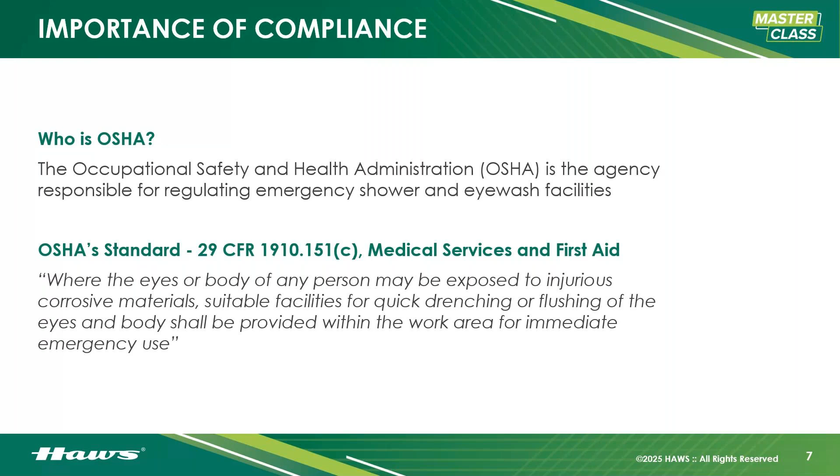Now, what we're doing by adhering to Z358.1 and educating ourselves on it is reducing injuries and fatalities, lowering general workplace risk, lowering potential lost time and money for the employee and the employer. There might be litigation, hospital bills - there's so much that's going to happen afterwards, the ugly part. This is insurance - adherence to Z358.1 is insurance against everything that's going to come after the incident.

Somebody gets exposed to a corrosive or nasty material or substance, and a lot is going to happen. This is going to ensure the employee goes home the way they showed up to work. It's going to ensure that as an employer, you have the proper functioning, working equipment for that employee. Even here at Haws, we have some areas where combination showers, full body decontamination needs to be taken very seriously, and that's what this does. This lets us know what we need to do.

Now, OSHA has stepped up enforcement, of course. On August 1st, 2016, OSHA fines increased for the first time since 1990. It wasn't that long ago, but that's still news to some people. OSHA fines increased by a gigantic, scary margin. Then effective in 2018, they said officially for inflation they'll be adjusting year over year, so there's never a big jump like that again, which was terrifying.

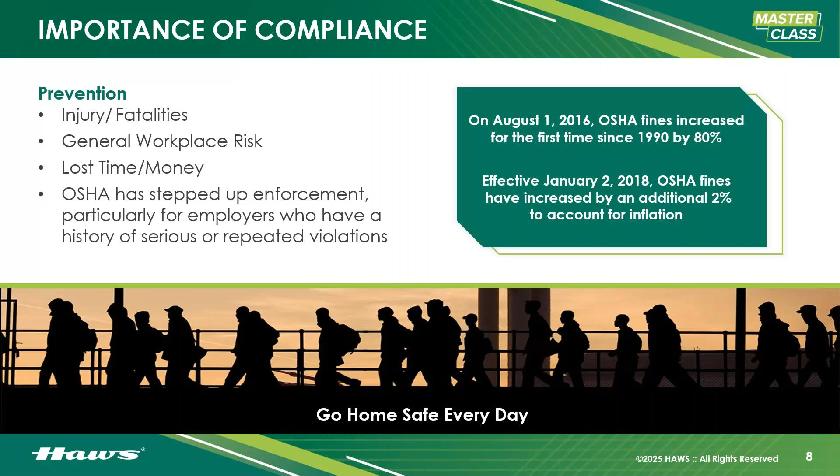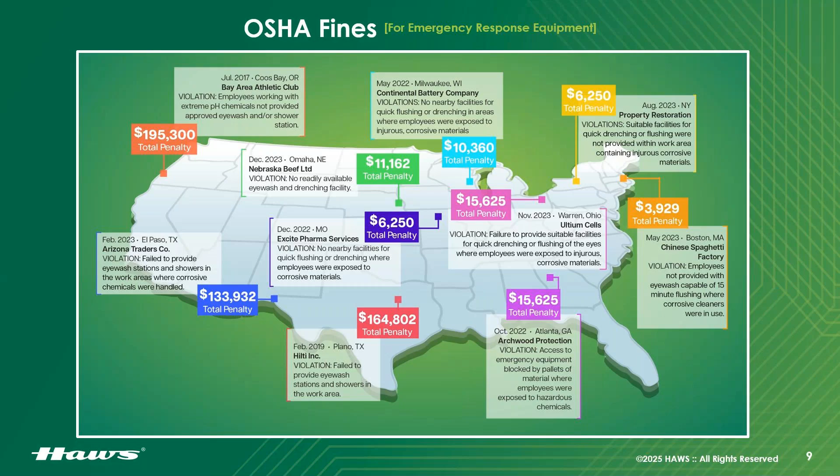Now, the standard itself was written by the ISEA, the International Safety Equipment Association. ANSI just defines the emergency shower design, location, temperature requirements, proper functionality. ANSI is the vehicle to move the standard, to distribute it and house it, and then, of course, OSHA references the ANSI standard.

Now, it was first published in 1981. It's had many revisions since, and we're really looking forward to the next version. Haws sits on the board and we work constantly to help improve the standard, to make changes as much as we can. Many manufacturers and many different organizations sit on that board, but right on page 2 or 3, you'll see Haws Corporation.

So many revisions. Very soon you can expect a new revision and probably a new webinar from us. Those revisions usually have meaningful changes about the operation of the equipment, changes to help you understand what's required, and things of that nature.

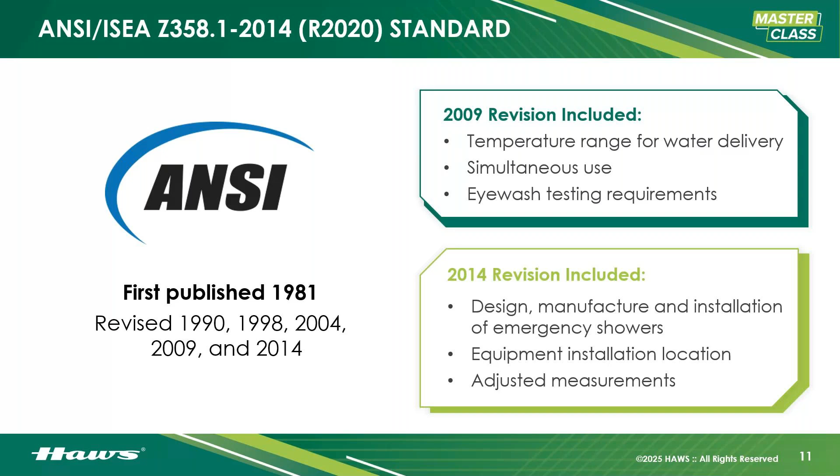Now, to get into the significant requirements of the standard and how to test for those, we are going to start right after we launch poll question number 1.

Alright, first poll question: how often do you test equipment? Please do not answer if not applicable. Do you test weekly? Do you test monthly? Do you test yearly? Do you not test, or are you unsure?

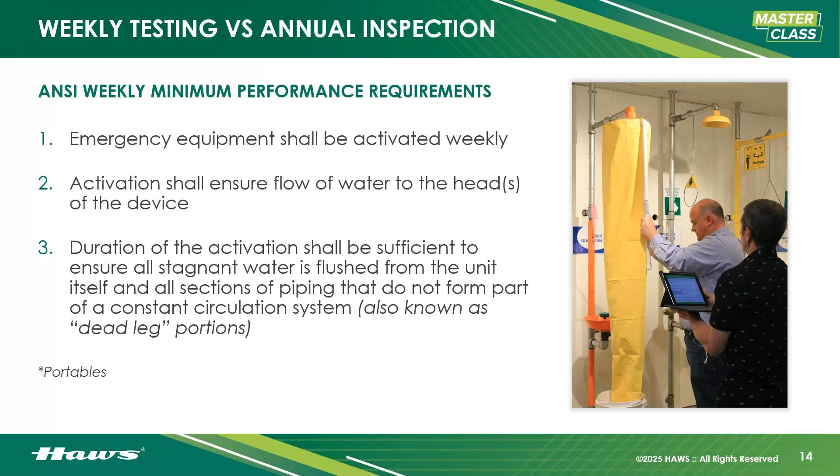Now, I know you're asking yourself, but Justin, what happens if I don't test? And that is a really good question with really bad results and answers. This is what's going to happen.

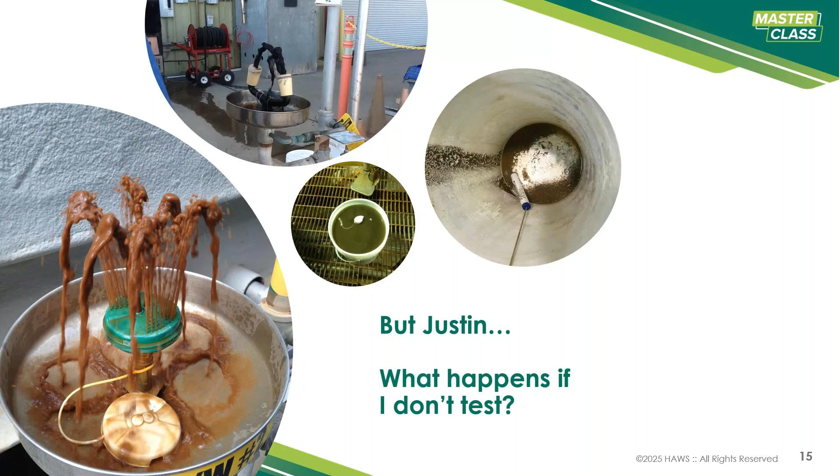I can't tell you how many pieces of emergency equipment I have turned on in my life—I didn't see that coming, and I'm amazed I've dodged exciting new lung diseases up to this point. But this is what you're going to get: the chocolate wedding fountain, Gatorade, coffee, and I think that's concentrated evil up in the left-hand corner. That's what you're going to get coming out of these. It's going to be gross, and this is potentially being sprayed directly into the wounds of somebody trying to rinse their body off as effectively as possible. So we need to keep that water moving. This is incredibly important.

That will bring us to poll question number 2.

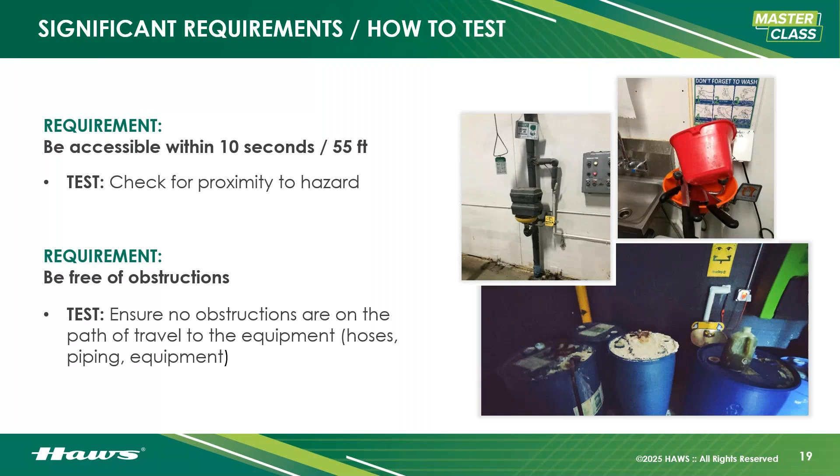The equipment also has to be on the same level as the hazard. We can't have stairs, changes in level, containment berms, and things like that I need to hop over or step up on, that I could potentially trip on. I don't have the best use of my eyes potentially, I'm panicking, I'm in severe pain, and I need to get to emergency equipment quickly. I can't be held to start navigating an obstacle course on my way there. So no changes in level - there is one exception to this, I'll talk about it later.

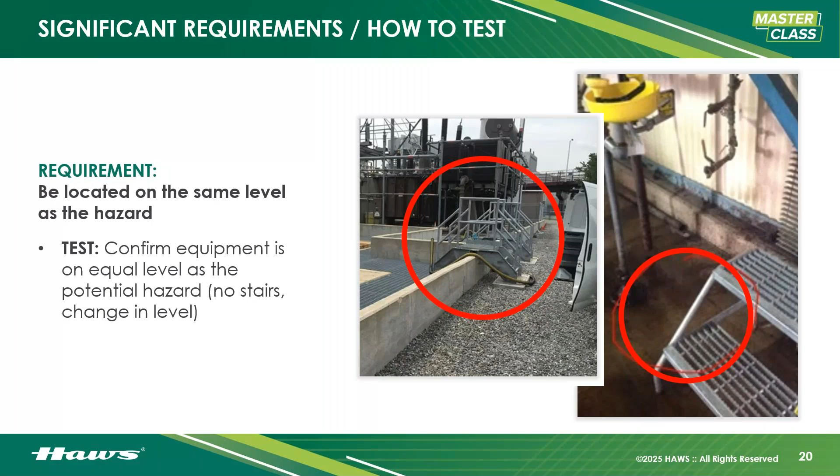If you were out in the yard working and had to identify this equipment from a distance and move to it quickly, there's a chance it blends in with the environment. You may not be able to identify it quickly enough to run to it, especially if you're working in areas of the facility you're not familiar with, or you're filling in, or new on the job.

So highly visible signage, well lit, is incredibly important. Just check the lighting in the area and ensure it's good to go. And the equipment has to deliver flushing fluid for a full 15 minutes.

Now if you're in a hospital corridor, a clean room, or somewhere else where you can't just dump 340 plus gallons of water anywhere, then I highly suggest you examine and fully investigate your facility's capabilities to provide that full 15 minutes. What's the tank size? What's the dead leg? What's the size of the piping? Go investigate. And if you have one shower connected to that system, run it for a full 15 minutes if you're capable, but go investigate your facility's capabilities first.

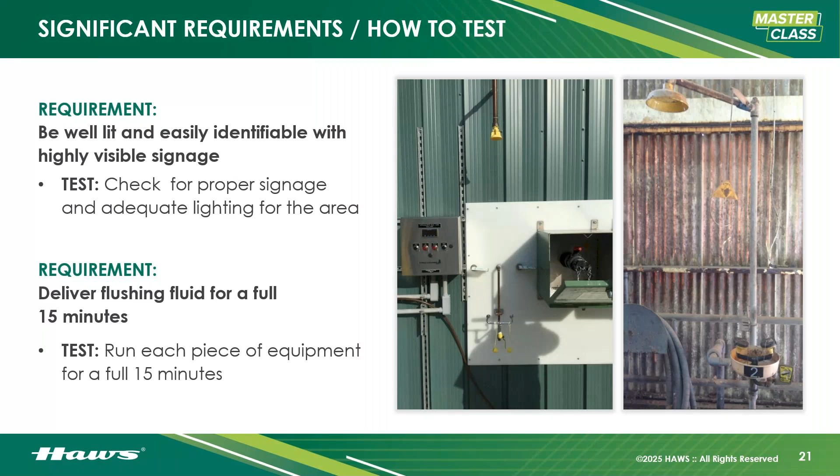Now, the outlets shall be protected from airborne contaminants - you have to have dust covers in place. This is super simple; we don't want clogging and things of that nature. Those dust covers have to be self-removing. You cannot have a dust cover that you have to physically grab to remove from the heads of the device. Upon activation of the paddle, those should pop off all by themselves without any additional steps. If it's taking additional steps, that's a problem - just activate the unit and ensure they're being removed automatically.

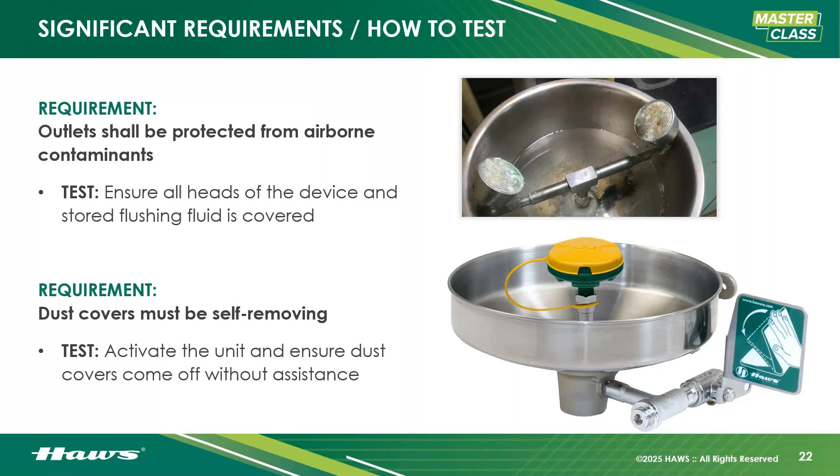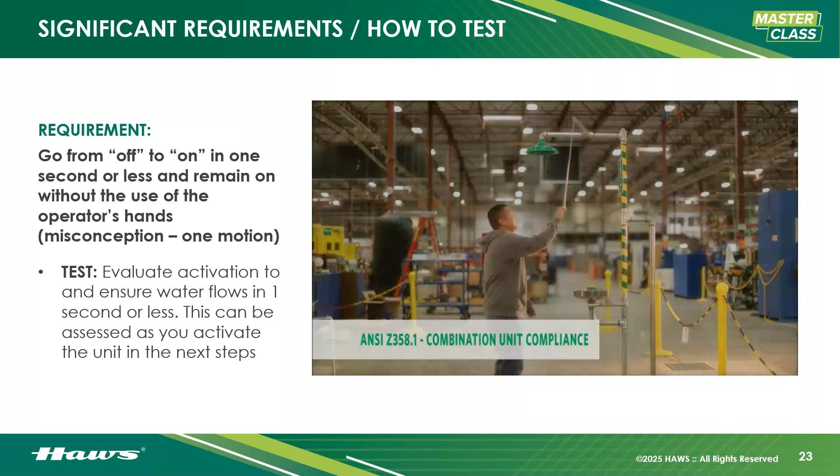Now, the equipment has to go from off to on in 1 second or less, and it has to remain on without the use of the operator's hands. This means a stay-open valve, because you have things to deal with - removing clothing, holding your eyes open, dealing with the emergency. You don't want to have to hold the shower open, hold the eye wash open, remove your clothes, and hold your eyes open all at the same time. I can rub my belly and pat my head, but that's a lot to ask. So ensure stay-open valves are in place and activating quickly.

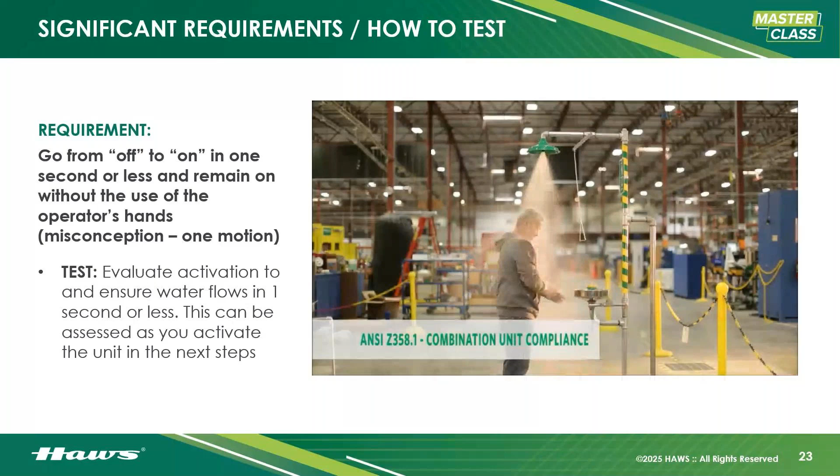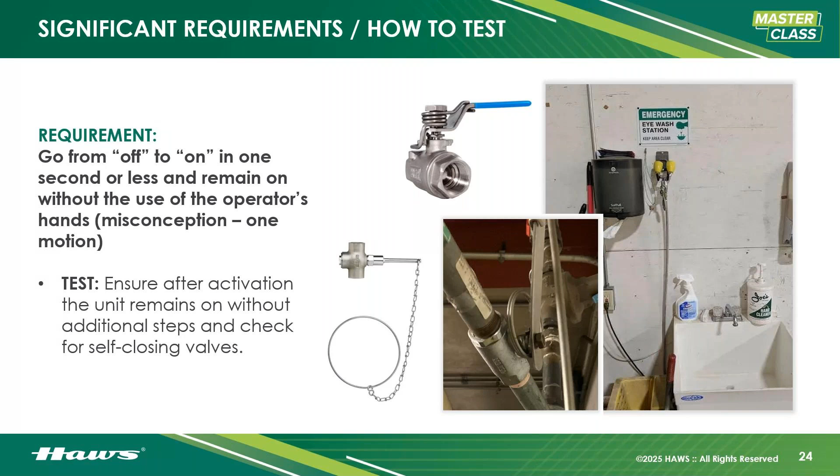Eye washes have to deliver 0.4 gallons per minute. Eye face washes, 3 gallons per minute. And drench showers, 20 gallons per minute. For my friends up north, that's 1.5 liters, 11.4 liters, and 75.7 liters, respectively.

These are the bare minimum GPM rates for eye washes, eye face washes, and drench showers. Above that is fine, GPM-wise. However, we start to get to the point where the equipment is borderline injurious.

I'll explain what that means. We want a controlled flow. If your equipment, your safety shower, eye wash, eye face wash is uncontrolled, if it is highly aggressive, uncontrolled flow from the equipment, this is a serious compliance issue.

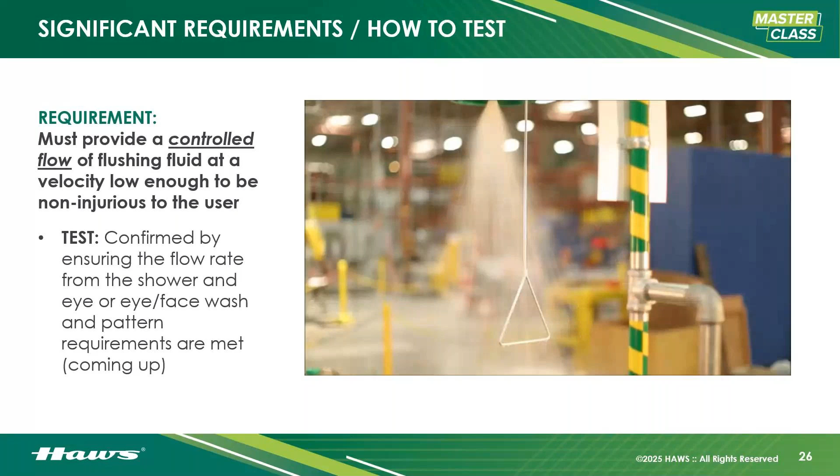Put yourself in the shoes of somebody who's just been exposed to something highly corrosive, and I have to step into something that's acting like a waterfall. I want something that's gentle, fully covering my body, rinsing me without further injury. This is incredibly important.

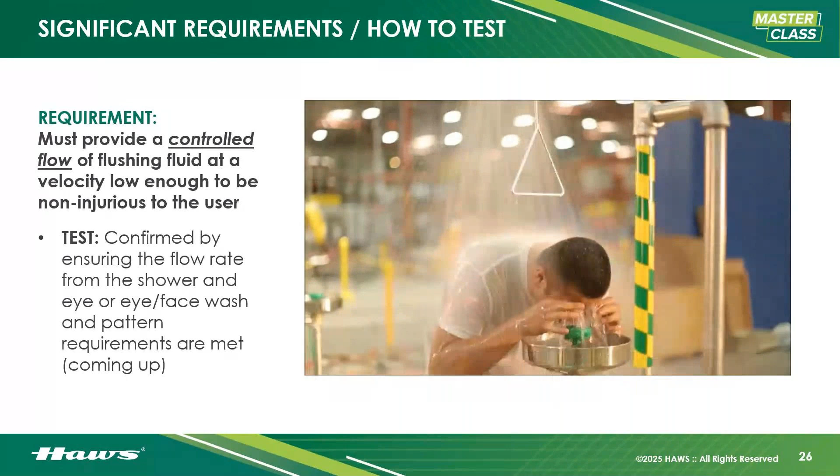This is a serious problem, so watch out for these. This is so much more common than I can even begin to explain.

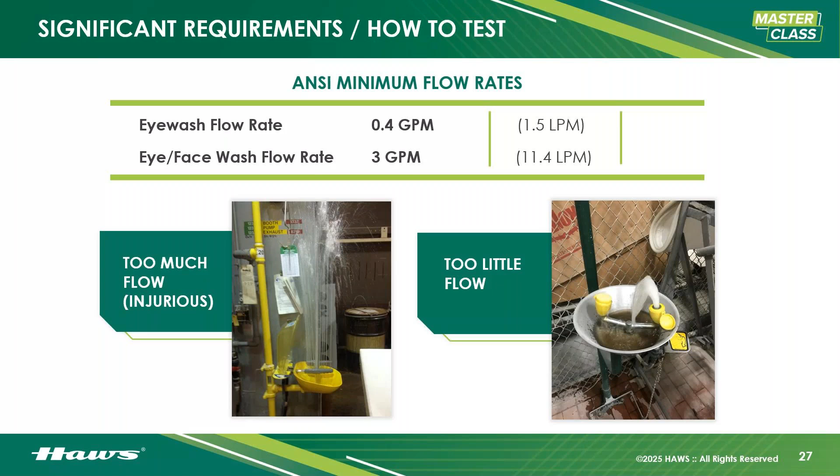This gauge ensures that as those spray patterns hit the gauge, it's within those eye circles, meaning it is going to be usable by a person utilizing it. I'll show you what that means and how you use it.

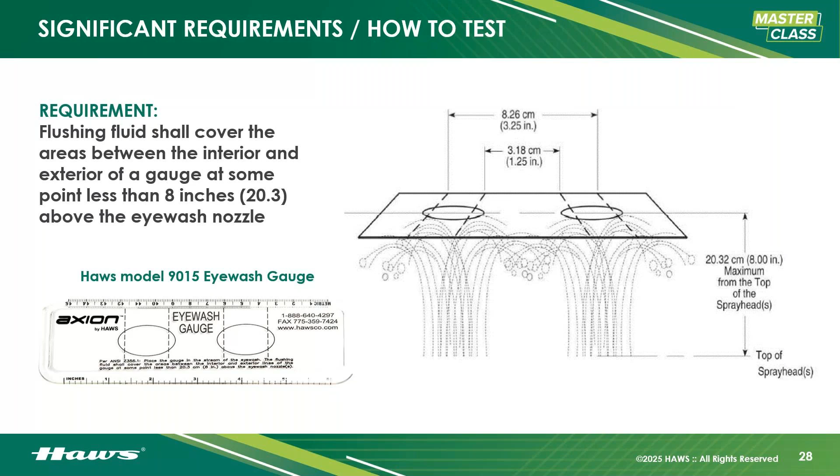What you want to do is measure 8 inches above the head of the device, then slowly lower the gauge anywhere between 0 to 8 inches. If that gauge aligns with the eye wash flow pattern, it's fully compliant.

I'm going to show you what it looks like from above so you can see exactly what that water looks like as it hits the gauge. So we have water flowing, we're measuring, lowering the gauge, and then we have those two dedicated eye streams.

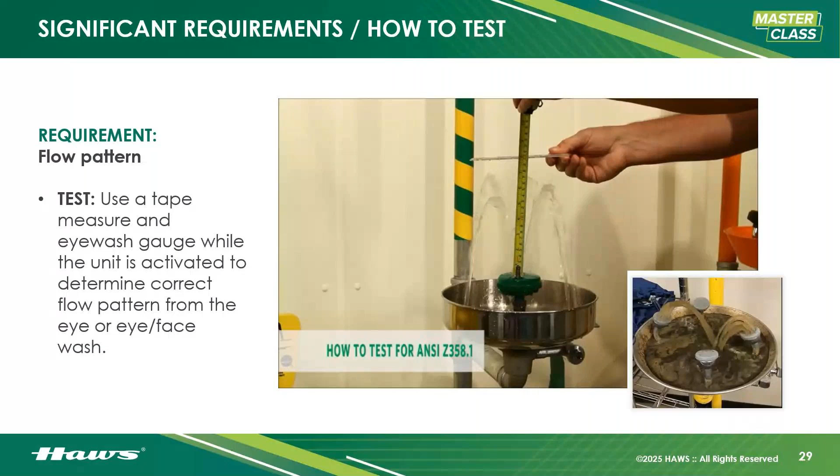This is our Axion technology, if you're not familiar with it. So we have forehead sprays, cheek sprays, and then eye sprays. Those two in the middle are our primary concern - the other sprays are going to hit our face, that's great, but those two eye wash sprays, we want those right in the eye circles. That means it is usable.

We're not actually measuring the amount of water coming out of the eye wash. This is how we're ensuring it's meeting the requirements and the manufacturer did a good job, which in this video we did. So pat on the back, go Haws.

This helps ensure that where that gauge aligns is going to be in an area where, on average, it's going to be able to be used by all of us. Again, based on averages and anthropometrics.

You'll be able to lean over and utilize that very easily, rather than it being aligned much higher off the floor or too low, where you might be squatting or on your knees trying to utilize the device. The heads of the device also have to be free of obstruction by 6 inches.

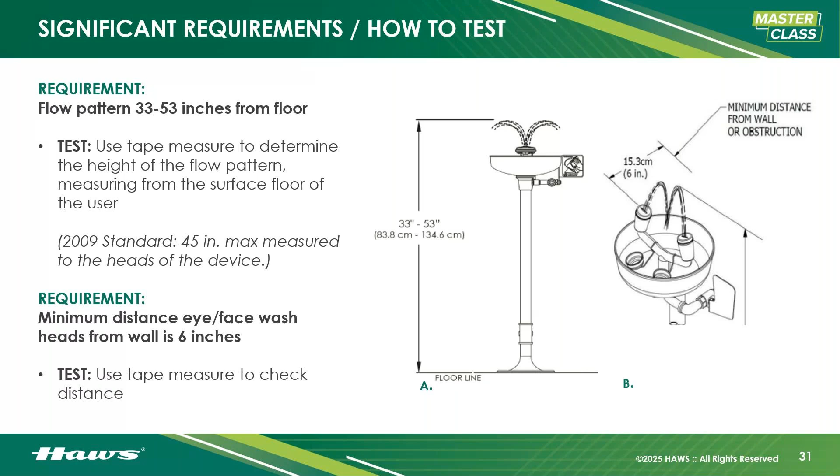Now, testing the shower and the eye wash. This is what we do. To check the flow rate for the shower head, we need our 5-gallon bucket with the 2-gallon water line marked, a shower sock and pole, and the thermometer. First things first, throw the thermometer in the bottom of the bucket.

If you're using that type, if you have a laser measuring device, that's totally fine. Just be cautious, because if it's borderline, sometimes you're measuring the bucket the water's sitting in instead of the water itself. Give it a second, let the temperature normalize on the device that's holding it, and then take your measurement.

Place the shower sock around the shower head and run it down into the bucket. Definitely ensure that second part, unless you want soggy loafers.

Activate the eye wash or eye/face wash if one is present. If it's a combination unit, that unit is designed to work all together, everything operating at the same time. It's never intended for the shower to operate without the eye wash or eye/face wash—there isn't really a situation where that should arise. If we're talking full body decontamination and the need, you would want the eye wash or eye/face wash on.

So ensure it's running, then activate the shower for 6 seconds. We're doing the same thing a nurse would do when measuring your pulse—they're not going to count for 60 seconds to give you your heart rate, they're going to count for 10 seconds or less and do the math in their heads.

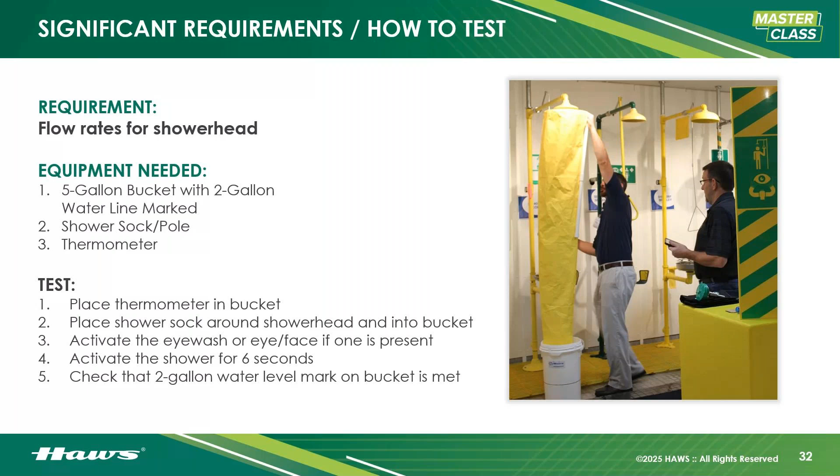Also ensure that from the very center point of that shower flow pattern, it is free of obstruction by 16 inches in every direction. That's the measurement I'm talking about—16 inches from any obstruction from the center of the column, meaning you need 32 inches of clear floor space in front of this unit to ensure compliance.

So if you want to mark it off, it used to be required in the Z358.1 standard that you paint the area around it, which is why you still run into units like that, or safety people who think that's required. It's not, but it is a great practice—paint the area, mark it off, and ensure nobody stores all their junk over there.

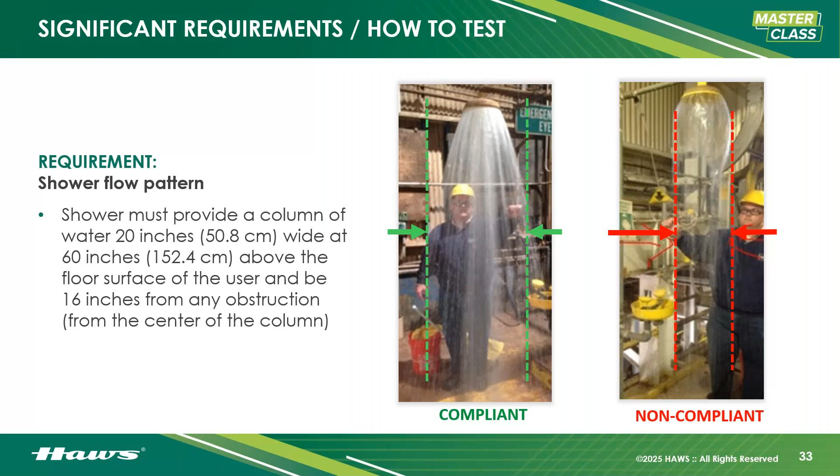This is my buddy Bill. He's doing exactly what we just talked about, taking the tape measure up 60 inches across 20, just ensuring compliance for the shower flow pattern.

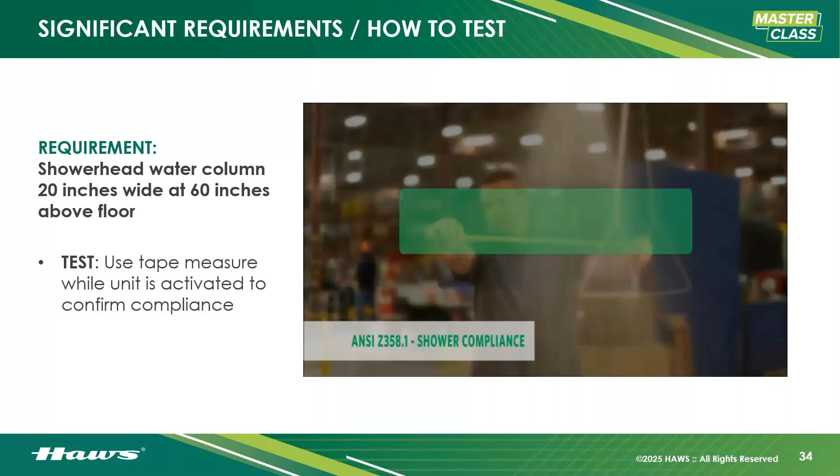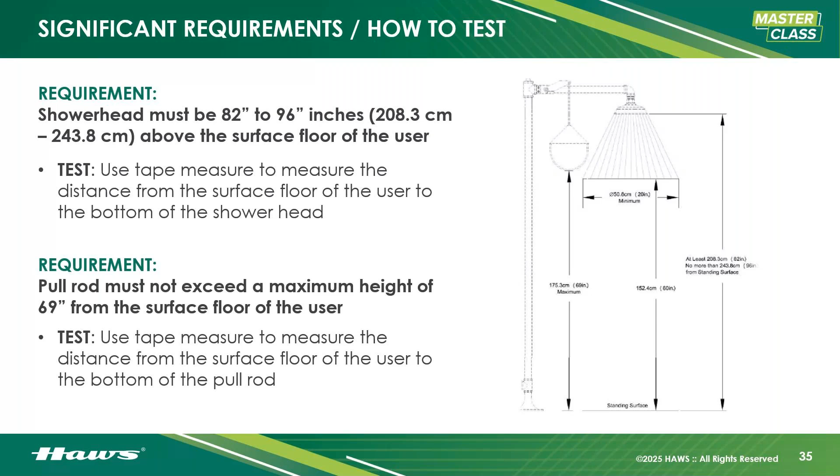Now, the combination unit, shower and eye wash or shower and eye face wash. We prefer shower and eye face wash. We've standardized to that. We don't think there's a situation where an eye wash is ever more appropriate than an eye face wash, if one is possible.

On a combination unit, why would I want something that just hits my eyes and then a shower that rinses my body, instead of a device that also rinses my forehead, face, cheeks, and eyes all at one point? I want full body decontamination and my best chances of avoiding things like skin grafts.

So those have to work together. They have to be aligned so that one person can use them, and they have to be able to operate simultaneously. This is a big issue.

On your weekly tests and annual tests, activate the shower with the eye wash or eye face wash on. The water typically takes the path of least resistance through the unit, meaning the shower head soaks up most of that water. As it's spraying, it will starve the eye wash or eye face wash—there's not enough water or pressure for them to run simultaneously. So ensure both are on at the same time so we know if there's starvation.

We could retrofit Haws Axion stuff, flow controls included. Ensure there are flow controls in your equipment, creating back pressure so the equipment functions normally and there's water left over for the eye wash or eye face wash. This is really important.

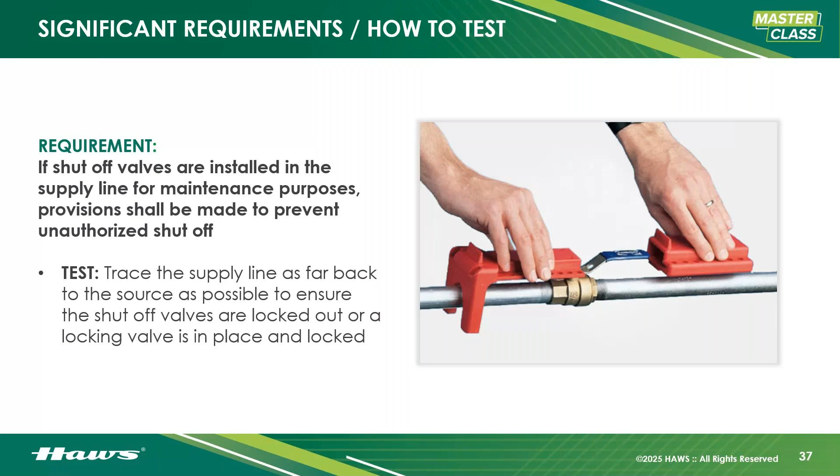Employees who might be exposed to hazardous materials have to be instructed on where that equipment is and how to use it. Educate your employees, quiz them. I like to ask employees, where's your nearest eye wash? Where's your nearest safety shower? Tell me where it's at, and describe how to use it. That lets me know, pop quiz time, that you know what to do, where to go, and how it works.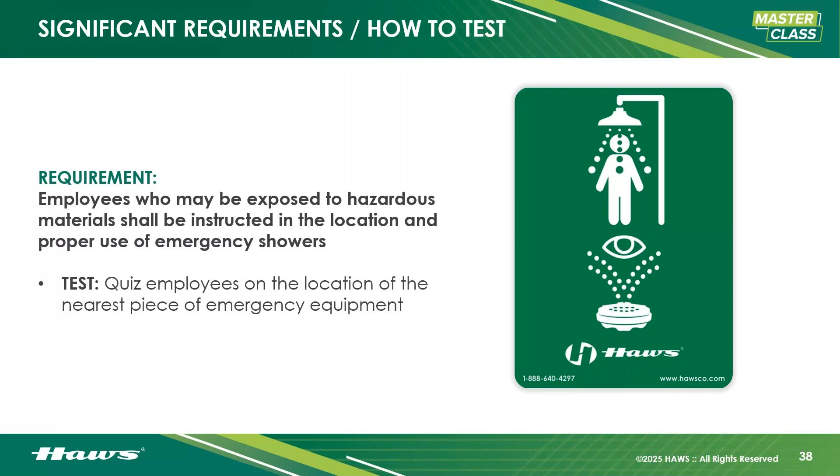If you experience freezing conditions, it doesn't matter if you're in northern Canada or in Texas—they both freeze. Almost annually we get gigantic orders of replacement valves for snap freezes in Texas, where you have burst valves and piping because they weren't freeze protected. Even if it's for a brief period during the year, ensure your outdoor equipment, or any equipment that may freeze, is protected from doing so.

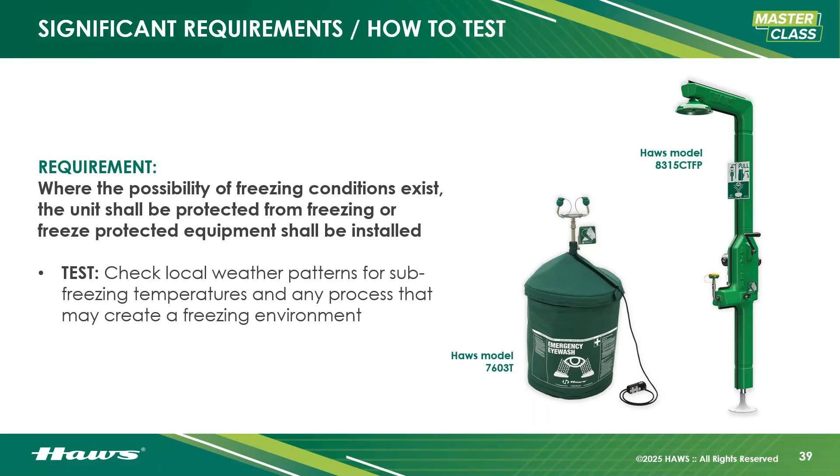Now, that temperature range I mentioned earlier, 60 to 100 degrees Fahrenheit, 16 to 38 degrees Celsius—we have to ensure it's within that range.

This is a pretty big range. It can be difficult to accomplish in some areas, but there's lots of supplementive equipment to help you do that - mixing valves to mix the hot and cold water, instantaneous electric heaters specifically designed for emergency equipment. Don't try to use those homemade or home-use shower units. You need something that is going to be able to pump out 23 plus gallons per minute. Steam heaters, like the 9400, utilize that equipment to accomplish this.

Make sure you're measuring during your shower test. Either if you're doing it weekly, do it weekly, that's fine, but on your annual test, make sure you are taking that temperature. And if it's not within compliance, we got to bring it there, and I'll explain why.

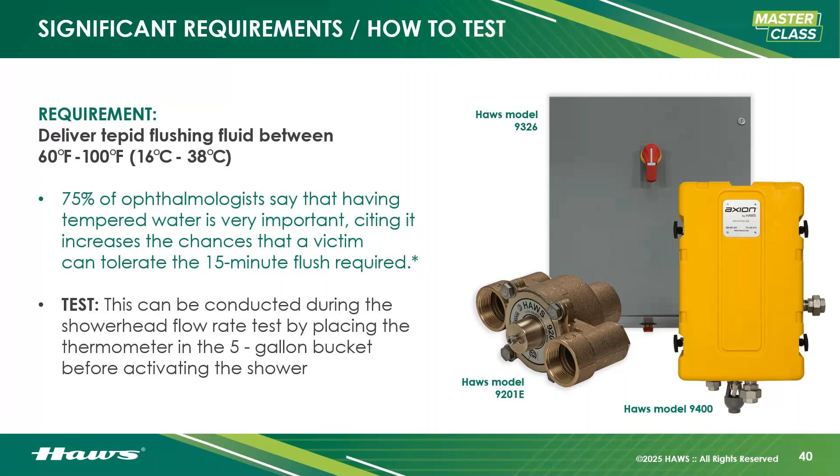If it's too cold, we risk hypothermia, cold shock, possible cardiac arrest. Anything less than 60 degrees Fahrenheit, there's a couple things you need to consider - wind chill factor, the weather. I don't have any clothing on, I'm exposed. Size is a huge concern too.

So what this is going to do, if it's too cold, the user may not remove their clothing, and that's a big problem. If you have corrosives on you or other substances seeping into your clothing and you're not taking them off, that clothing will protect and help that chemical or whatever endure longer on your body. It's not time to be shy, you've got to be in your birthday suit. If it's too cold, you may not remove your clothing, and that's bad. Or the user might just exit the equipment before the recommended time has passed.

If it's too hot, hyperthermia - we're going to heat up too quickly. Possible heat stroke, confusion. You want to be in the best frame of mind possible coming out of this equipment because you have questions to answer: What were you exposed to? How long were you exposed to it? Where? You want to be able to work with the first aid responders. It's going to be an awful situation, it's going to move fast. You're going to be panicking, but if there's no supervisor or manager or they don't know what you got exposed to, you should still be able to answer questions. That's your best chance for survival. Hopefully a supervisor or manager is there helping you too.

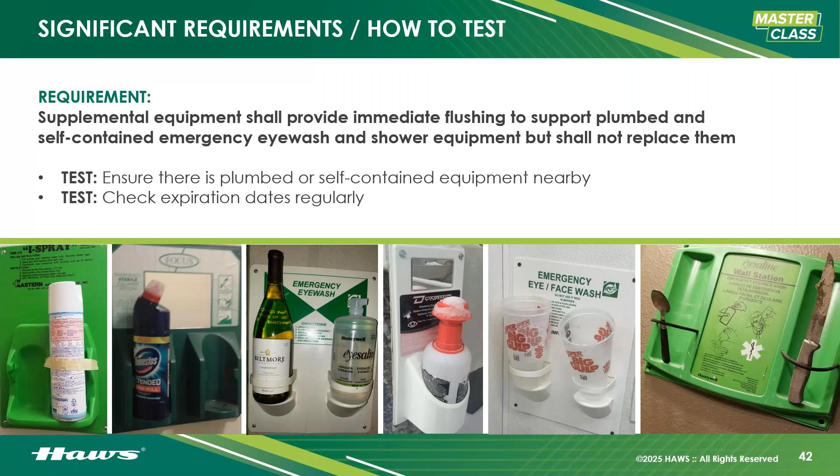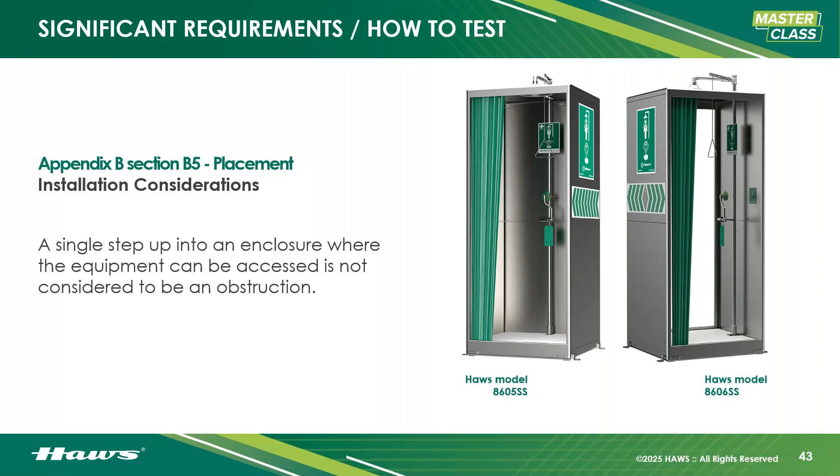That will bring us to poll question number 3.

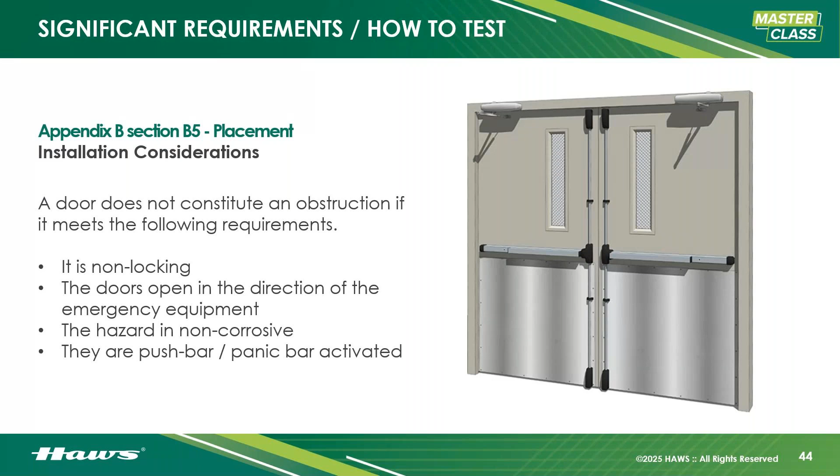All right, getting into our third poll question. What are your primary ANSI compliance issues? Please check all that apply. Please do not answer if not applicable. So: accessible locations, tepid water, injurious or uncontrolled flow, low flow, uneven flow, or eye wash and shower simultaneous flow issues.

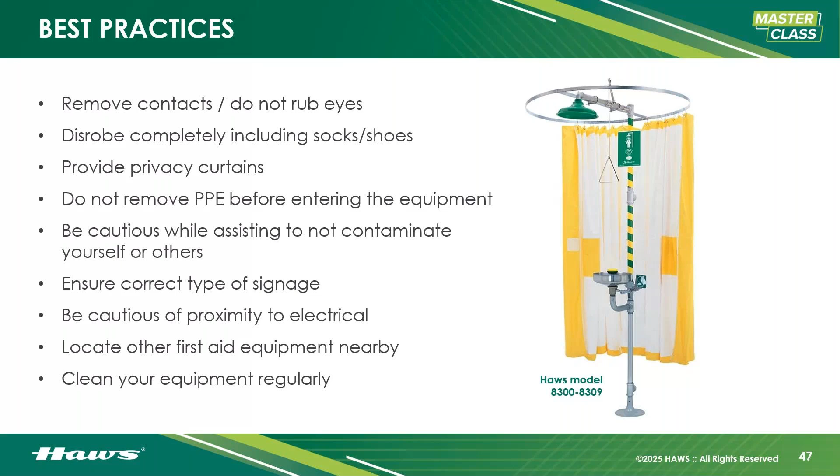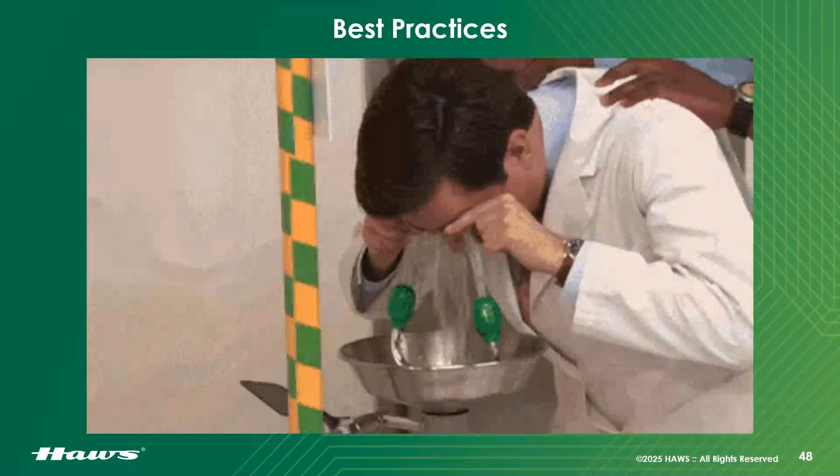Alright, ANSI Z535.1-2017. Color coding is super important, so everyone in your facility knows what each color means. We'll start off with the color red: this is danger or stop. This is frequently used for stop bars or buttons on machinery.

Next we have yellow, and this is caution for any tripping, falling, and striking hazards. Orange will be warning, so parts of the machinery or equipment that may cut, crush, or otherwise injure. And safety green, which may or may not be the color of the manufacturer's webinar that you're attending right now, is for location of safety equipment, super important so everyone knows where to go. Blue is considered for policies, so not immediately safety related, and this applies to company policies. And then any other color is definable by the user as needed.

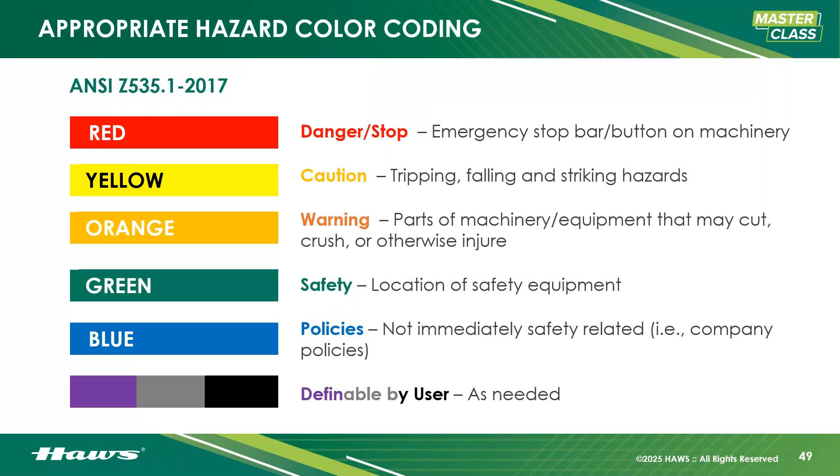All right, Haws surveys. I'm here to show you the reality about compliance rates and give you a few resources to help get you back into compliance if that's an issue that you're running into.

No need to fear, that's exactly what our site surveys are for. The best part about our site surveys is that they're completely free. You will get 1 full day of inspections completed by professionals who are trained in the ANSI standard. Haws itself has over 75 years in the emergency equipment game, so we know what we're doing. You can trust us. Keep in mind, restrictions do apply depending on how many units are at your facility, but we always ensure to complete as many units as possible.

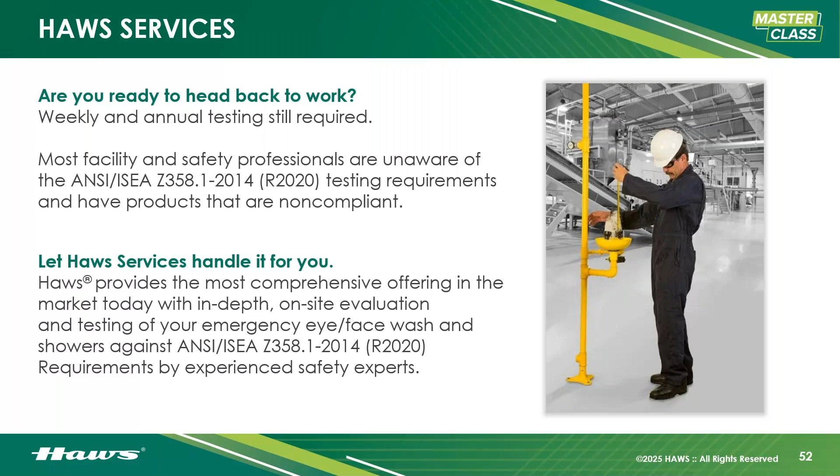Haws Services will send a fully qualified professional to you. They are trained to work on any piece of equipment from any manufacturer, so you don't just need Haws equipment. They are trained to work on Haws, Speakman, Guardian, you name it, they're trained on it. And keep in mind, they will also come out to any facility type. Haws Services will also provide a comprehensive site evaluation with training on how to test your equipment. The Haws Services techs are amazing, and they're not only going to give you evaluation and training, they're also going to fix all the issues that they find, which is probably the best part.

The services that they offer are truly, truly next level. They can do weekly and annual testing for you, preventative maintenance and contracts, repairs and upgrades, startup commissioning on new equipment if you're looking into a more complicated unit like one of our tempering skids. As mentioned, they also offer online training and certification as well as warranty service.

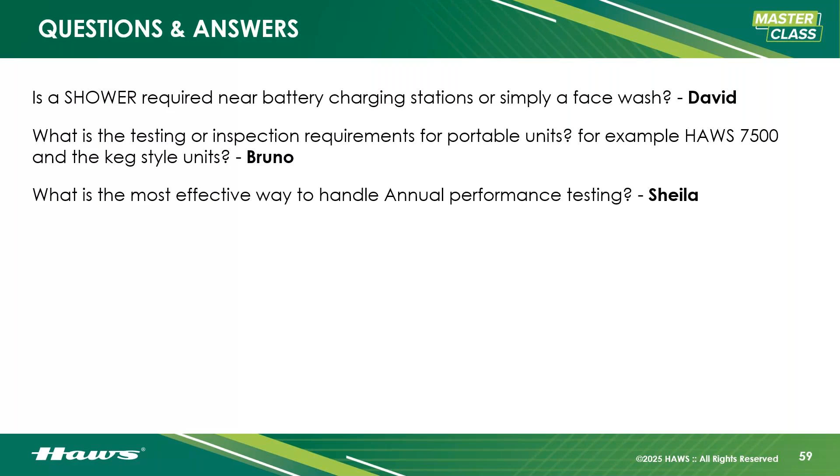When are emergency showers required in a space or project? What agency or codes require their installation? That was submitted by Ryne.

Three things you want to check, right? First is the easy one, 29 CFR 1910.151C. That is letting us know from OSHA that something is required when we know there's exposure to injurious materials.

I need an eye wash, I need a face wash, etc. Look at the safety data sheet. The safety data sheet tells us everything. It says rinse your eyes for 15 minutes, rinse your skin for 15 minutes, I know I need a combination unit. If it says just rinse your eyes out for 15 minutes, all I need is an eye wash. Again, preferably an eye face wash. I plan for the worst. But that will tell us what it is that we need. It's under the first aid section in the safety data sheet. That's what you want to check.

And then lastly, Z358.1, to ensure that equipment is functioning in a way that will help you, so that if OSHA does ever have to investigate, they're going to compare it and you will be in compliance. So check the safety data sheet. As long as that, for whatever chemical or substance you're utilizing, has a first aid section, it tells you what to use and outlines what's necessary, you have to have emergency equipment for potential exposure for that area.

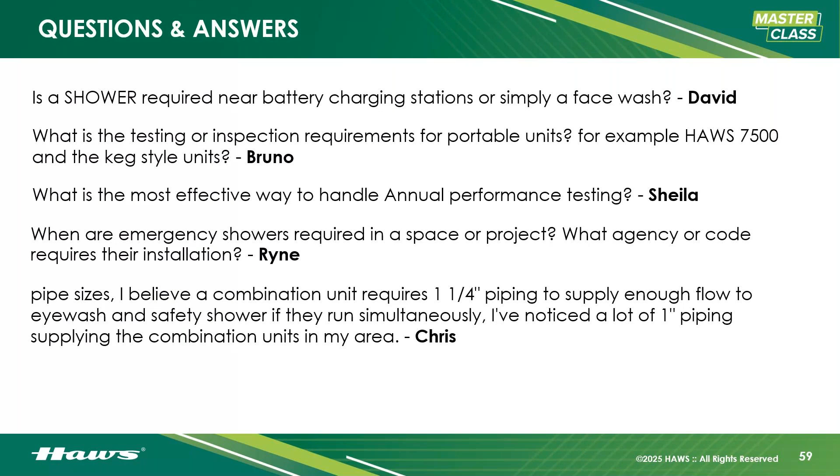From Chris, in regards to piping sizes: I believe a combination unit requires 1 1/4 inch piping to supply enough flow to eye wash and safety shower if they run simultaneously. I've noticed a lot of 1-inch piping supplying combination units in my area. Yeah, it's more of an observation, and you're totally correct. All manufacturers require 1 1/4 inch piping to supply the combination units. Very frequently it's 1-inch, and that sucks. It's a bummer. It is what it is.

You'll find starvation, especially for - and I'm not going to pick on anyone because that's not my style - but there are manufacturers that utilize much more water than Haws uses. We utilize the bare minimum. We just use intelligent engineering to ensure that it's being as effective as possible. We don't want to drown them, we don't want to injure them. We want that water distributed across the user in a way that is as meaningful as possible. But there are units out there that use, while ours is using 23 GPM, theirs is using 40 GPM or more. And at 1-inch, that's starvation. It's not going to work, right? But yeah, that's super common and super dangerous.

Next question from Tony: If you have existing emergency shower/eye wash stations that do not have a tepid water system, do they need to be updated? Tony, good question. So if you do have that existing equipment and it's not meeting 60 to 100 degrees Fahrenheit, they do need to be updated. There's no such thing as a grandfather clause in the standard. So if they were installed in 2013 and we're on the 2014 standard, it's required regardless. There's no grandfather clause, so we have to get those up to speed.